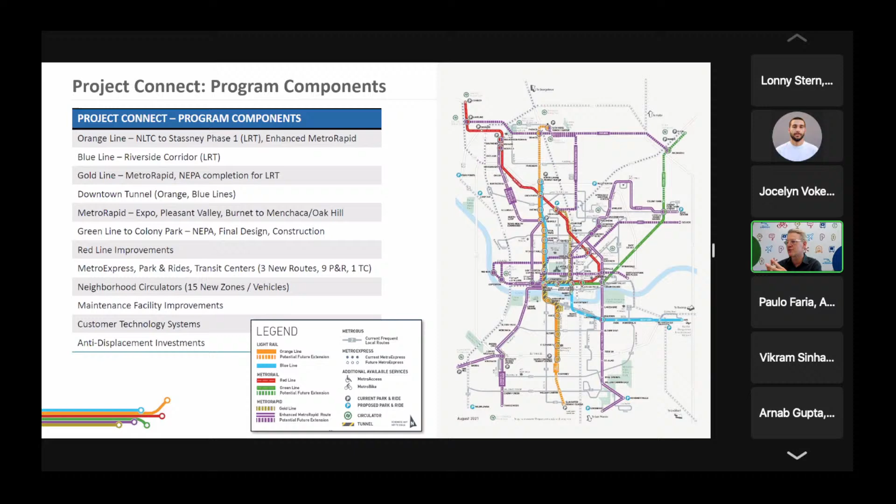But also the program involves a new commuter line, the green line, and improvements to the red line, the existing commuter line, plus 4 new Metro Rapid lines, 2 of which are already under construction. So we're already starting to move into implementation on certain aspects of the program. There are improvements to local service, new park and rides, new pickup zones, new facilities, lots of different elements. All these pieces have to fit together into this working system.

And just right off the bat, I want to talk about the elephant in the room, which I think has gotten a bit of press of late, and probably not a surprise to most of you. But costs on the program are going up. That's what we're seeing. Some of that is being driven by things we've discovered along the way. And so part of this process, the design process, is really about identifying all those elements that will have an impact on costs so that then we can manage those going forward.

And some of those include additional right-of-way and real estate costs, changes to project program scope. We learn things from the technical process, we hear things from the community, we adjust the design accordingly. Some of those things have increased cost. But also globally, we're seeing enormous inflation and construction escalation costs. This is a global phenomenon, but particularly acute here in Austin, where the economy is so overheated, or so hot, I should say. And so all these factors are contributing to a pretty extreme cost environment.

And that's going to be something that we're going to have to manage. I think tonight is about looking at the design, looking at where we are today, because a lot of work has gone into getting us to this point. But going forward, we're going to have to make some tough choices. As a community, we're going to have to look at project phasing. That's going to be an important part of managing costs, but there may be other choices that we're going to have to make. But importantly, that's going to be an ongoing and robust discussion with the community. We're going to have to make these choices together and move this program forward together, and we're going to commit to do that.

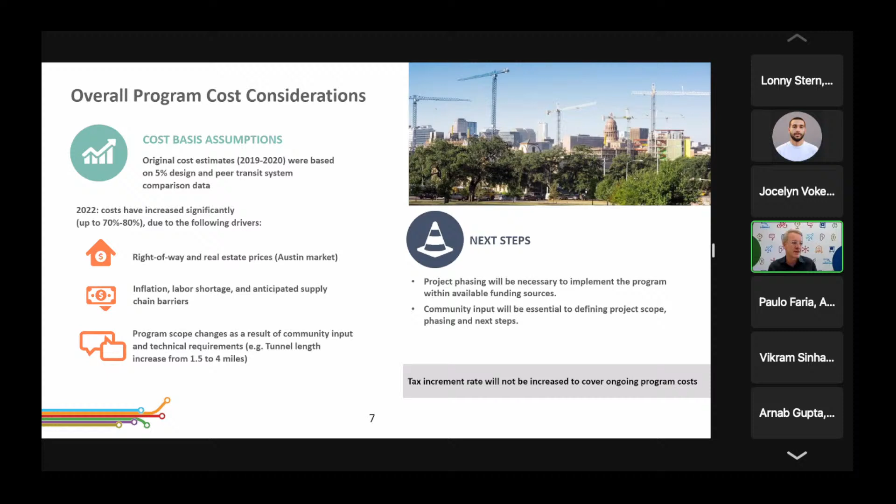Okay, now that I got that out of the way, we can get to more of the fun stuff. And with that, I'm going to pass it over to my colleague Paulo, who's going to talk about our approach towards the subway system overall.

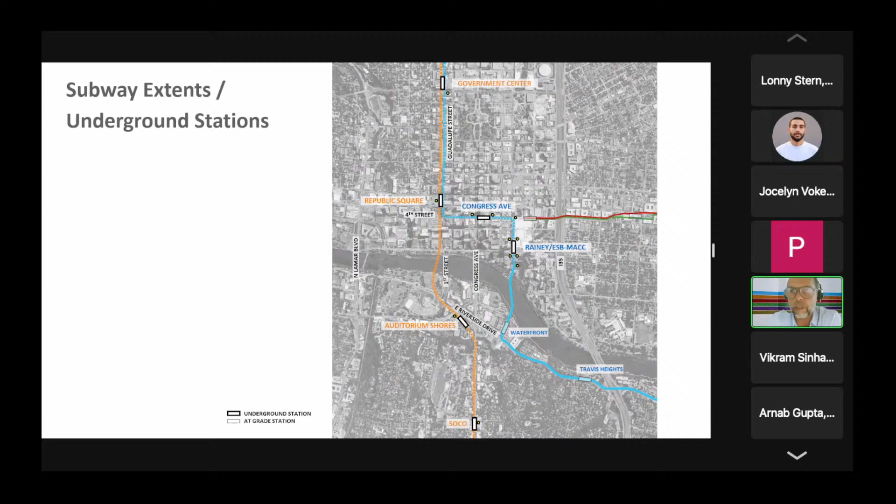Thanks very much. So we are going to concentrate today on the underground station, the subway stations. I think they have their own challenge in terms of design, in terms of experience, in terms of how they relate to the urban realm. We'll really focus on the downtown stations, and go on a one-by-one basis to evaluate and show their sites, opportunities, and constraints.

It's really an example of a typology. We are talking about relatively deep stations to be able to make the arrangement, the alignment work. Because we're coming underground, some locations we're going above ground, so we have to make it work. We have to make those stations to a specific height and depth.

The overall idea is that you engage in the urban realm, you get vertical circulation elements or stairs to a mezzanine or concourse, and make a decision that distributes yourself again to the platforms. So there are certain things associated with underground stations that are important.

People lose their cognitive abilities. You can get lost underground because you lose your connection with the sky, you lose your connection with different elements that you know and recognize. So there are certain things in the navigation of the stations that are important. The idea of getting below grade is not something that humans like to do, so we have to manage that and create experiences that are orchestrated around our own cognitive challenges.

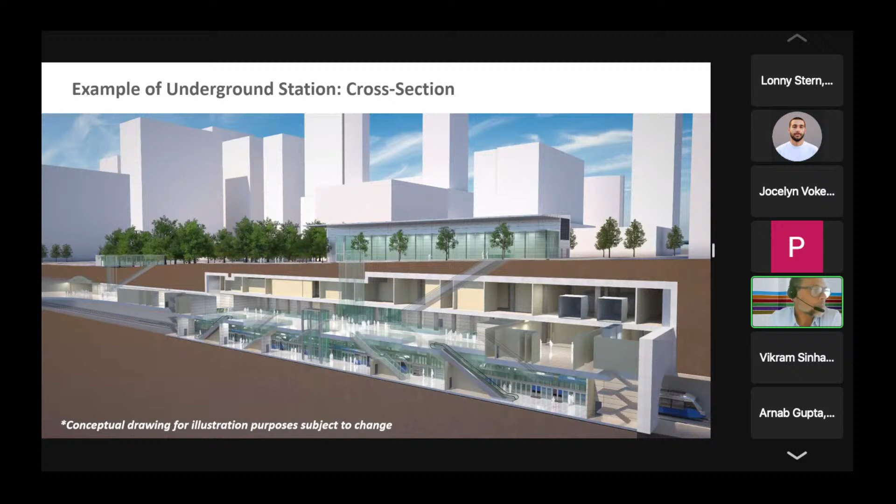Ultimately, we have to design for all. So the aspiration is to implement universal design. The designs are developed independent of individuals' abilities. We have to design for the visually impaired, we have to design for people that have mobility challenges. So one design has to fit all.

That means we have to adapt the design to provide equal access, universal design, and full accessibility to all. So the choices that should be made by people that are able-bodied should be the same choices that are made by somebody with a disability.

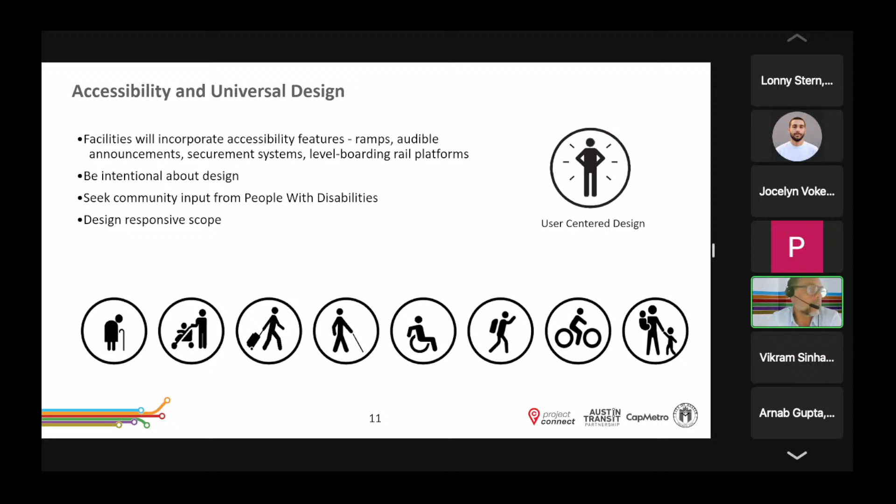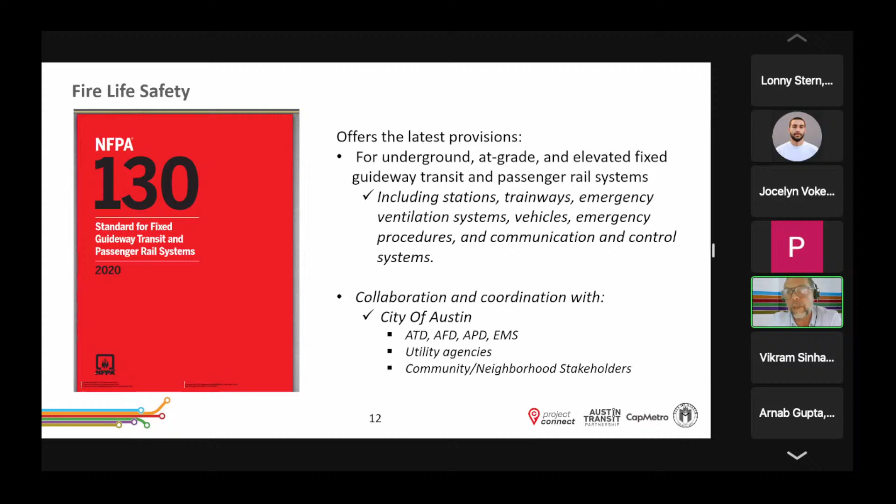Another important thing is security and safety. We have to design for NFPA 130, but it's not just because we have to — it's obvious that if you are underground and you have limited ways to escape for conditions that rarely occur but do occur, like fire or other emergencies, you have to make sure that the stations are ventilated and exhausted, and that people can achieve points of safety within time that allows those systems to kick in, without risk to life.

From a design perspective, what's important is that we have three different zones. We have an entry pavilion that should be legible, meaning it has to be recognized in the urban realm because people have to find the stations. It has to have a positive presence on the urban realm, something that enhances the public realm and the streetscape where it's sitting. We have to make the vertical circulation elements — elevators, stairs, escalators — visible at every moment, because as you are in a station zone, you want to see your options of vertical movement ahead of you.

Visibility of vertical circulation elements is paramount because it makes you anticipate your next step. What you don't want is people spending more time underground than they need to. So we want clear sight lines and as much visibility as possible, from a point of view of safety and navigation of the station. We're trying to orchestrate the experience, making sure that sight lines and paths of travel are clear, and that each zone can see the other zone, giving you predictability on your next steps of the trip.

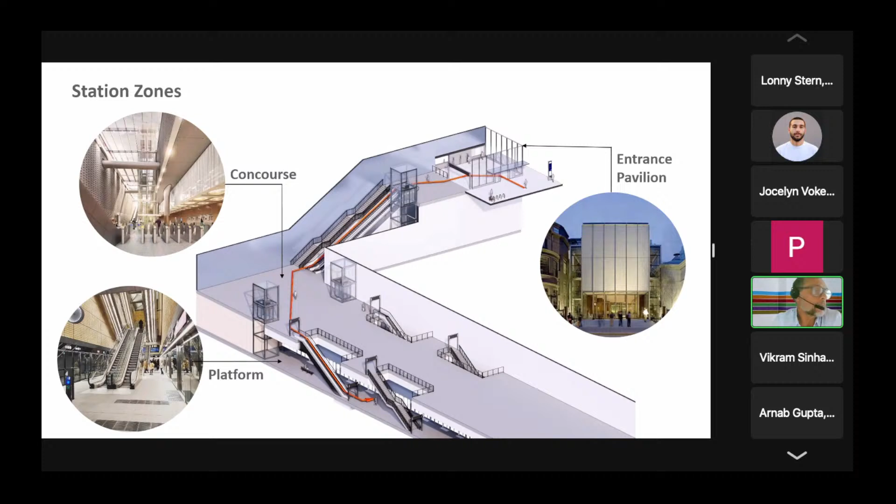So we want to minimize the number of decision-making points. You want to make a decision at the street — that is, I'm going into the subway. To do that, you have to provide clear information about the system, where you need to go, whether the service is running, if it's on time, what the next train is, and where it's going. You want to push that decision to the streetscape and the urban realm, so people only enter the system when they have definitive information and can embark on the trip.

It is important from a point of view of safety as well, that you don't want people meandering and uncertain about where they go.

Right now the idea is: can we provide enough information at the right place at the right time, so people engage with the system at the street? They go down underground to the mezzanine and concourse, and then they have to make another decision: am I going southbound or northbound, eastbound or westbound? So you have a choice to make on which direction of the line you are taking. We want to minimize decision-making points because we want people to be able to read the journey early and consistently, and we have several ways to do that. You can use light, texture, color, form, and public art to help people understand this journey and have a safe and tranquil trip. We want people to be at ease, comfortable, and secure about the reliability of the system.

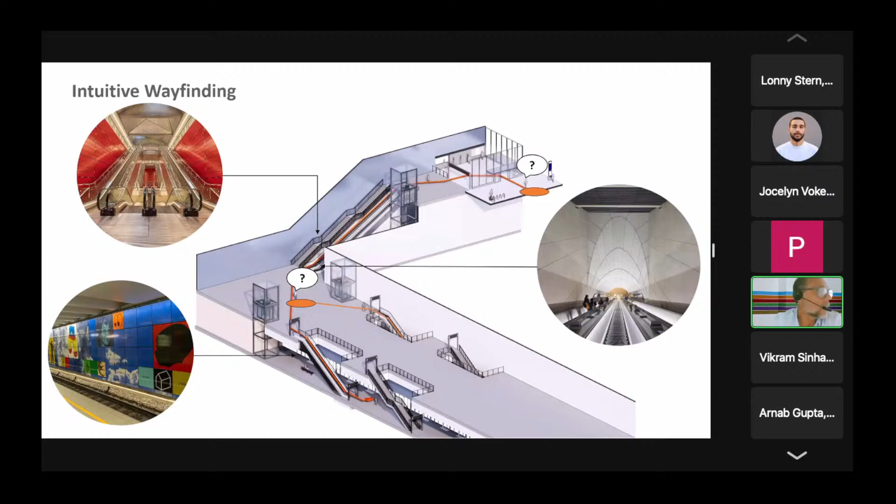An important thing is natural light. As I said, you lose your bearings underground, and as you are leaving a train or connecting with an underpass on a concourse, you want to see where the light is, where the sky is. You should use natural light as a tool for intuitive wayfinding. You can have signage that supports intuitive wayfinding, but you want the architecture to be guiding you to where you need to go — the design of the stations, the use of skylights or different ways to introduce natural light. Natural light has its own temperature, color, and quantity, and is tied to our circadian cycle, so knowing whether it's night or day and understanding where the light is coming from helps people navigate the stations because they understand where they need to go.

So the strategic and wise use of natural light is something that we're trying to foster through the stations as much as we can.

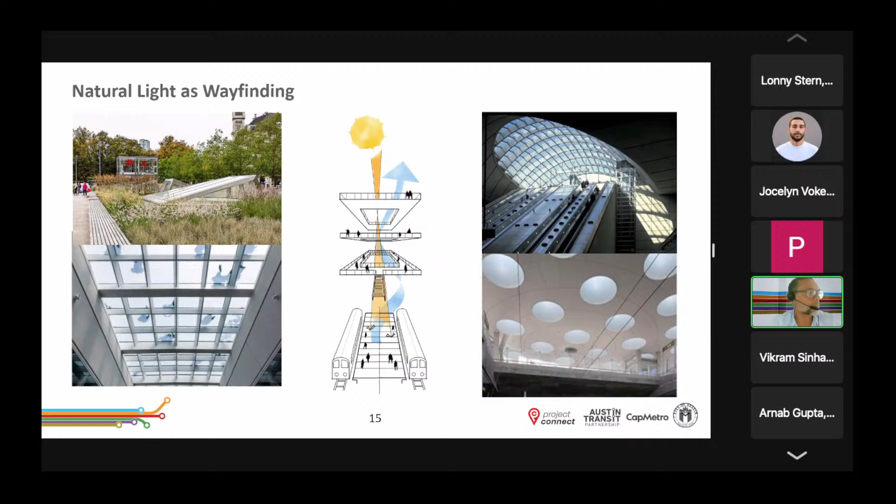We don't always have the right way to have an entrance pavilion that has the proper kind of civic characteristics — we're trying to instill a sense of civic pride and make us all owners of the infrastructure. Sometimes we don't have the space for that, so we have to use standalone elevators or standalone entrances that are smaller and have to fit on a sidewalk or in a smaller space. I think the basic characteristics don't change, but it's more a matter of scale, making sure that in those smaller entries you have the same degree of certainty about the service running. It's about providing the correct information to the user at the right place and the right time, independent of scale, whether you're in a building, a canopy, or a stair on the sidewalk.

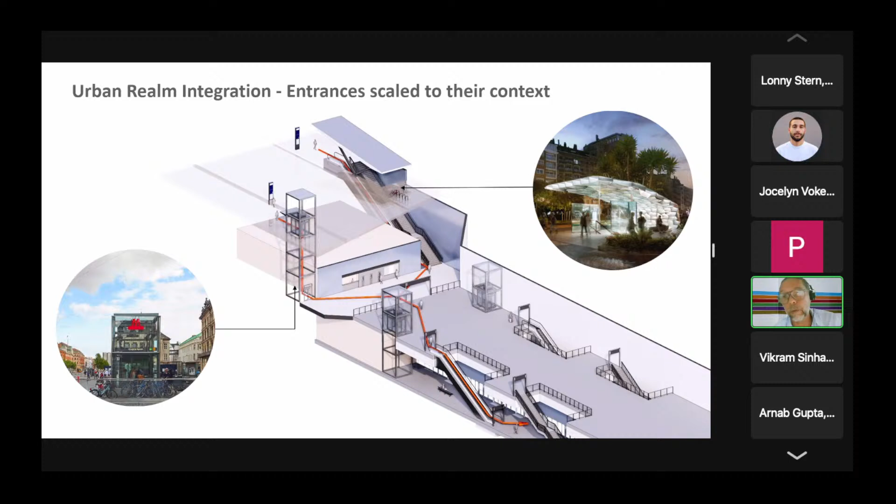So just as a summary, I think we have to foster a seamless path of travel, making sure it's direct and as straightforward as can be. We want visible and predictable entrances so people can orient themselves and find the system. The success of the system has a direct correlation to how usable it is, so you have to make entrances visible and predictable in the urban realm.

Have a clear and organized passenger information plan that ties digital and physical information — it's not just about the signage within the station, but what people are getting on their device, other planning tools like maps, area maps, strip line maps — making sure all the pieces of this passenger information plan are integrated and serving the user.

Reduce as much as possible any blind spots. It's the application of CPTED, crime prevention through environmental design — making sure you don't have hidden places, niches, and areas where your vision is obscured. It's not just from a safety perspective, but from a perception of safety perspective as well. You want people to be calm and safe as they navigate through the stations — no dead ends, and as I said, maximizing daylight.

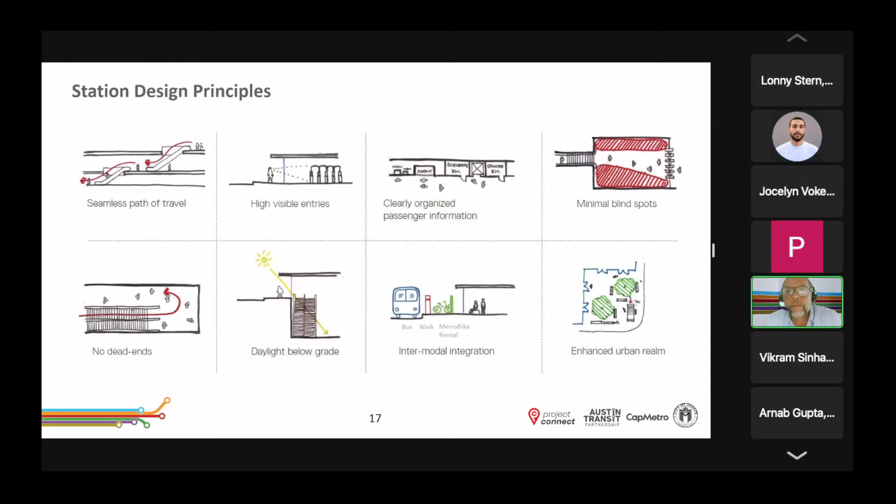We want to hear from you in one of our pauses: what are the types of amenities that you would like to see on the underground stations? We are trying to design based on user needs, so we thought it would be good to give some examples of what other systems use. But that's not the full menu of options—we want to get to the full list by working with you.

So some of these are amenities, and some others are necessary—like a customer service booth with attendants and ambassadors of the system who can help people that don't necessarily do well with digital tools and digital planning.

So having somebody to talk to is always good. Retail or vending machines offer convenience, being able to grab something as you're going to work or going home. There are systems with new technology where you can scan a product through your device and get it.

It requires a partnership with some supermarket—but retail, vending machines, water coolers, elements of wayfinding more associated with the context, area maps, institution maps, or elements that help you navigate outside of the station. So information products for the context in the urban realm, not necessarily for the station itself.

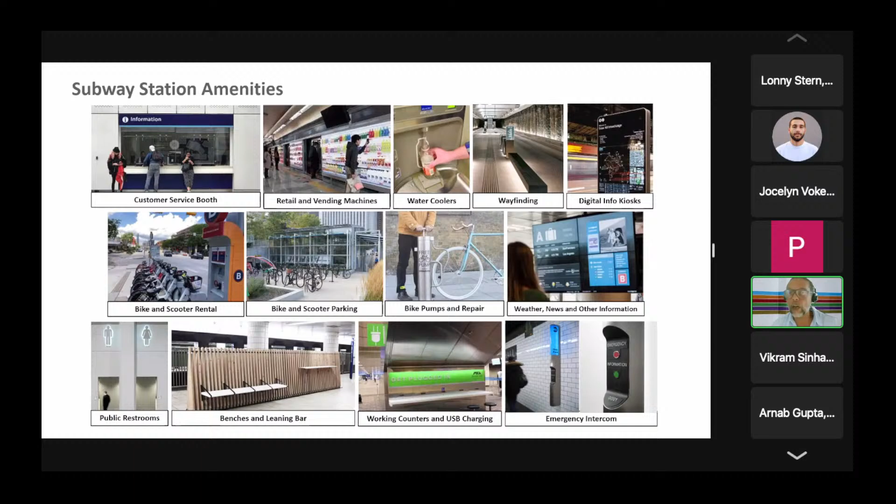Communication devices, intercoms for safety and security. So these are kind of the more standard palette of things we're looking at, but we'd like to hear from you if there are other opportunities we haven't thought of, doing something that is tailored to Austin. Next.

One thing that's important to know is that constructability has a direct impact on how the stations work. On the left, you have a cavern done by a TBM, a tunnel boring machine, that has smaller impact to the urban realm because you are tunneling in a mining way, but that has issues of cost and has to be in the correct soil—it has to be in the same alignment, so you can't do that everywhere. So we have to actually engineer things to choose one of those two options.

The other is cut and cover. That's top-down construction, where you retain the wall, then excavate and build something underground. But we are not talking about that because we don't know what those things are right now—we know what the techniques are, but we don't know when we're going to apply them. My next slide is just to point out that depending on how we actually build, there are different expressions for the station.

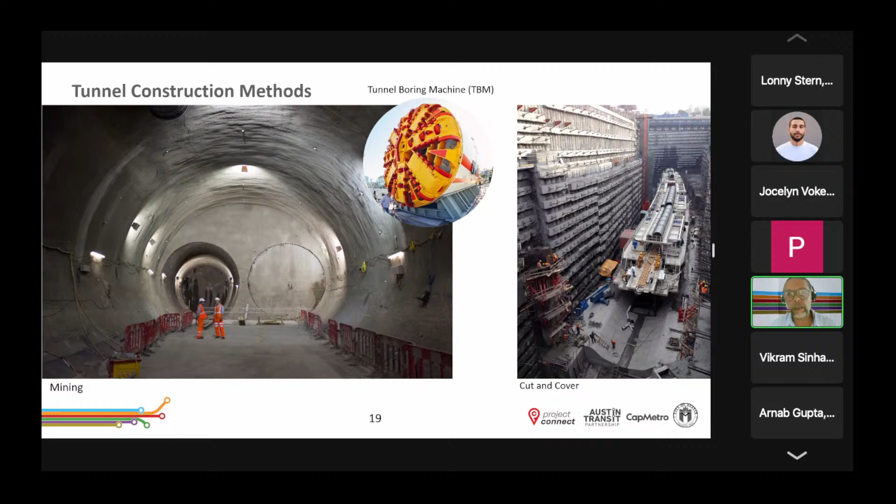On the left is the Elizabeth line in London, done by TBMs, where you have the shape of the tunnel being excavated that provides a more compressed space, where wayfinding is more fundamental—you have to really have those tunnels where you go and connect A to B in a very direct way, and that requires one type of architecture and design expression.

On the right, we have cut and cover—that really lets you create grander spaces that are better for wayfinding. But at the same time, there are pros and cons that go beyond what we need to decide. If it was left for architects to choose, we would know what to choose, but in reality this has impacts and requires a lot of engineering to happen before one of those two methods is chosen. And we are not there yet.

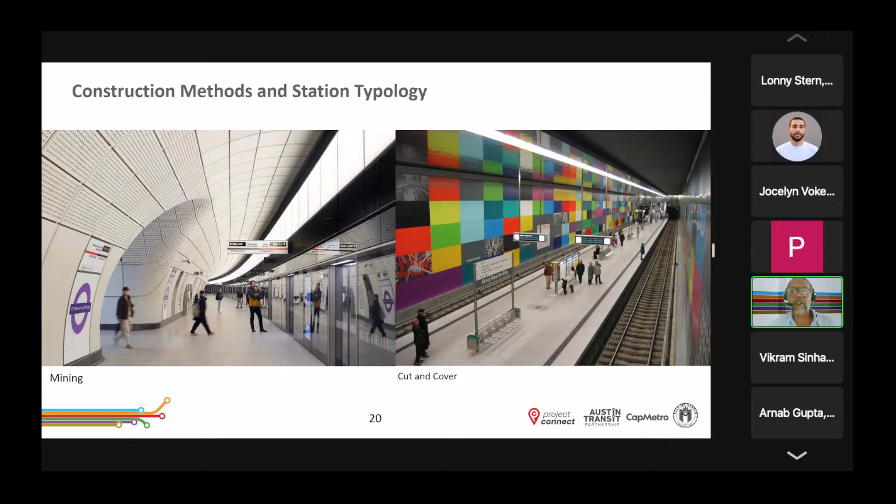Okay, so that's my part, and I'll let my colleagues go into more detail on the Orange Line North stations. Thank you.

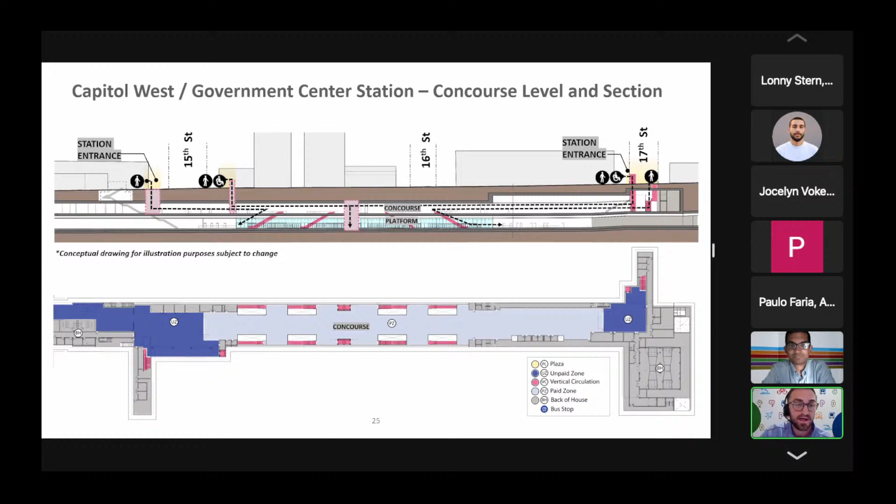With this station, we also have back of house elements, as Vikram pointed out, represented by that gray color. Those are critical to make the station operate well—everything from lighting to air conditioning to ventilating the underground station, which is very critical for safety in the event of a fire or emergency, making sure the air quality underground is safe for humans. That's absolutely critical with all these underground stations. It won't be available to the public to access, but it is critical to make the stations operate, and you'll notice these elements in all of our underground stations.

So that covers Government Center, and we'll move a little bit further south here to Republic Square, down near 5th and 6th Streets on Guadalupe. So back to you, Vikram, to cover the area.

Yeah, just really quickly, this is an exciting area. A lot of changes happening here. We're looking again to place the station a little north of Republic Square, but really the station box itself will be located under the street. Just a lot of things going on here. And Andrew, I'll let you talk a little bit more about it.

Sure, thanks Vikram. One thing I didn't point out at Government Center, but I think is even more critical here at Republic Square, are the bus transfers. Right at the square between 4th and 5th Street, that's a major bus hub for Austin. Having good connectivity points from the local buses to the underground light rail system is going to be absolutely critical, and that will continue to be planned along with the Orange Line and Blue Line designs as we progress. Making sure we have bus stops located near our station entrances will continue to be of prominence here.

This station's a little bit different than Government Center in that we do go off of the right of way a little bit more. Between 5th and 6th Street we have a little bit more room for that prominent station entry plaza and really the activation of that public space, which is great for this area in particular.

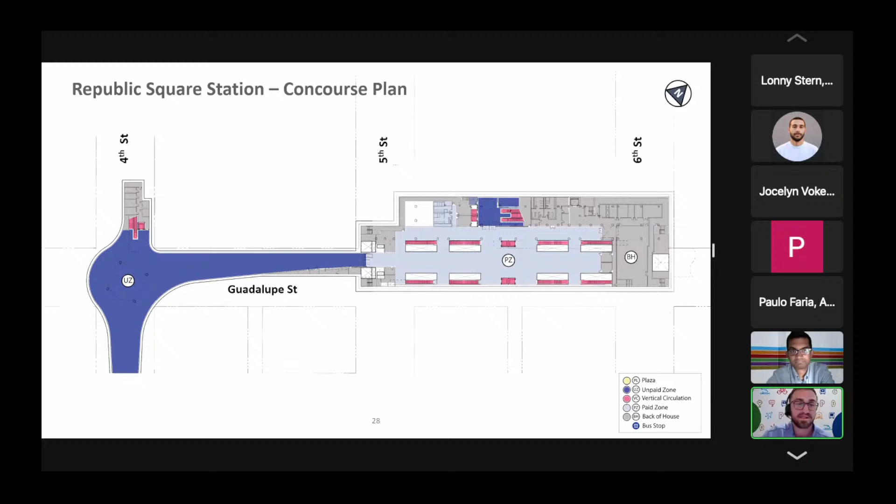This station in particular, I think we have a section view next. Great, so just wanted to point out that this station is actually a little bit deeper, so it has 3 levels rather than 2 like we saw in Government Center. This allows us to have that nice long public space in the form of that concourse, given that we can locate some of the back of house elements on the first level closest to the surface, and create that continuous concourse all the way to the Congress Avenue station with the Blue Line, then down to the platform level to create all those wayfinding elements and nice public spaces underground.

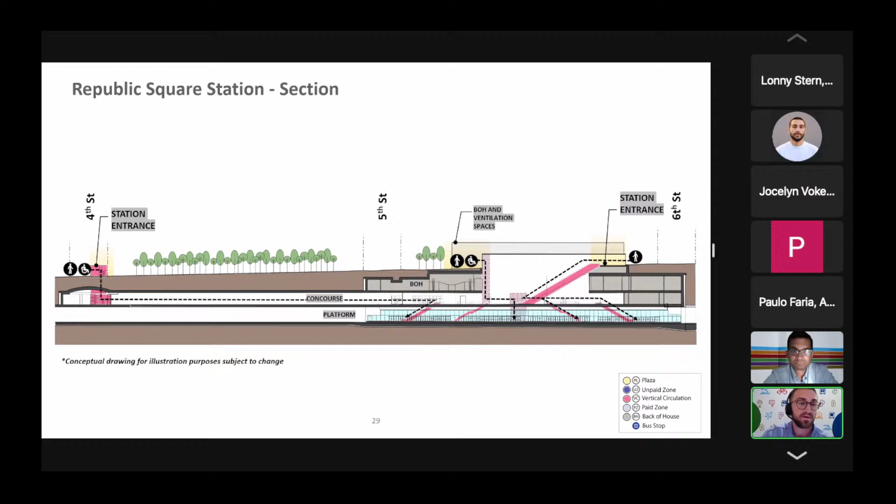I think we might pause here a little bit for some questions and answers. So back to you, Lonny.

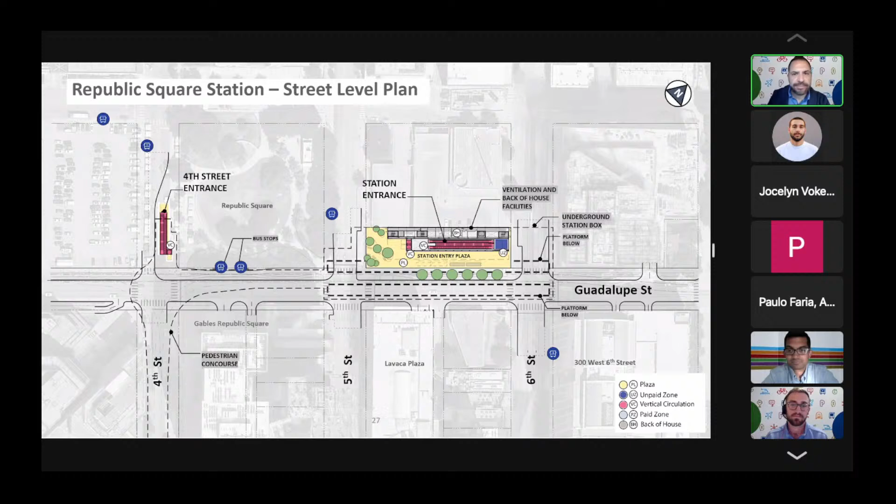Thank you so much, Lonny. I do have a question about cost cutting regarding some of these. Is there any discussion about maybe scaling back some of these, specifically like the mezzanines that connect one station to another? Since we have sidewalks, that seems like a sort of an added luxury. Is there any way of maybe delaying those to manage costs, or is that still being looked at?

So to your point, everything is still being looked at. Right now we're walking through the system as we would like it to be, and certainly we're open to discussions about what the system could look like given the cost situation that was mentioned earlier. We don't know what form that's going to take. A lot of that discussion is going to be with the community, identifying why you feel one particular aspect of the project is a luxury, whereas for other people they might feel it's a necessity. We're going to have a robust conversation with the community first before we make any value engineering decisions about any of these stations.

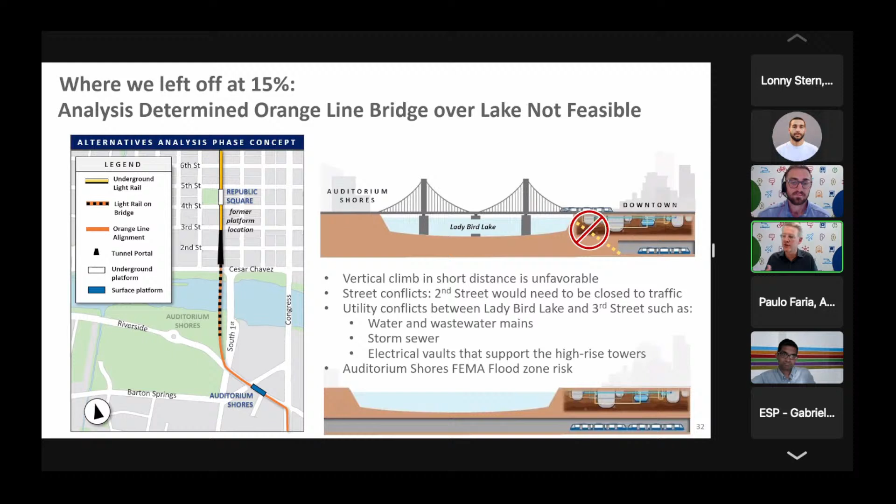We got a lot of feedback on both those options, and there was a lot of positive feedback on extending the tunnel, recognizing it was an additional cost, but because of the ability to locate the station more central to the commercial business district of SoCo, and more evenly spaced between Auditorium Shores and the Oltorf station, that's where we were at 15%. We got lots of feedback on it. There was a lot of enthusiasm for option B, the long tunnel version.

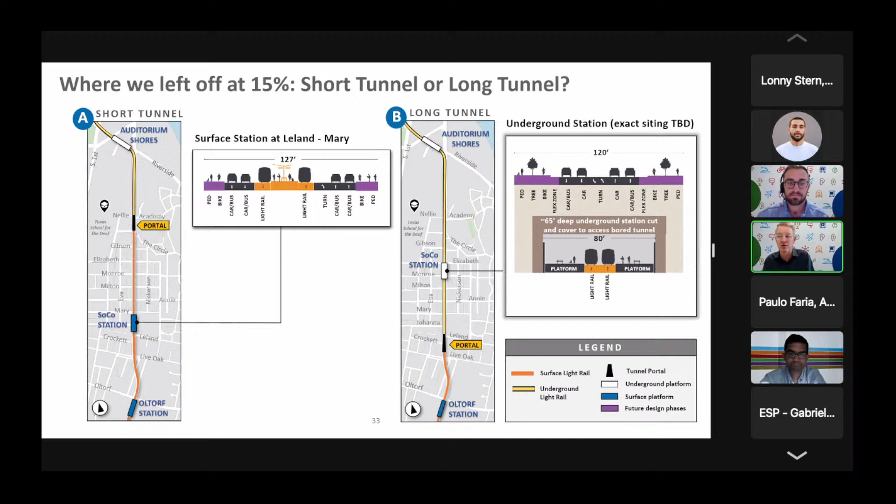Okay, go to the next. So in the process of developing the design beyond the 15%, we went back and studied all of our assumptions and constraints, working through the problem. One of the things we revisited was the details on the Congress Avenue Capitol View Corridor, which runs essentially from Live Oak Street north to the Capitol Dome. We knew about that beforehand and we were avoiding it - it wasn't an issue. We were aware of it.

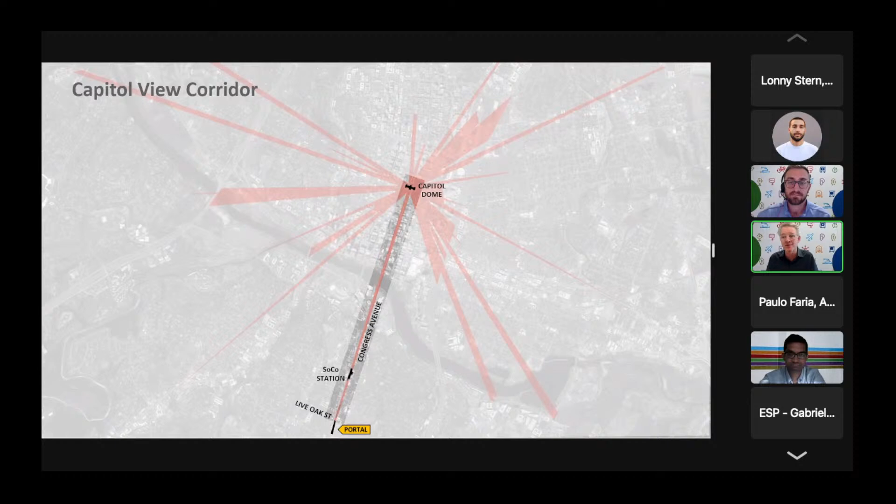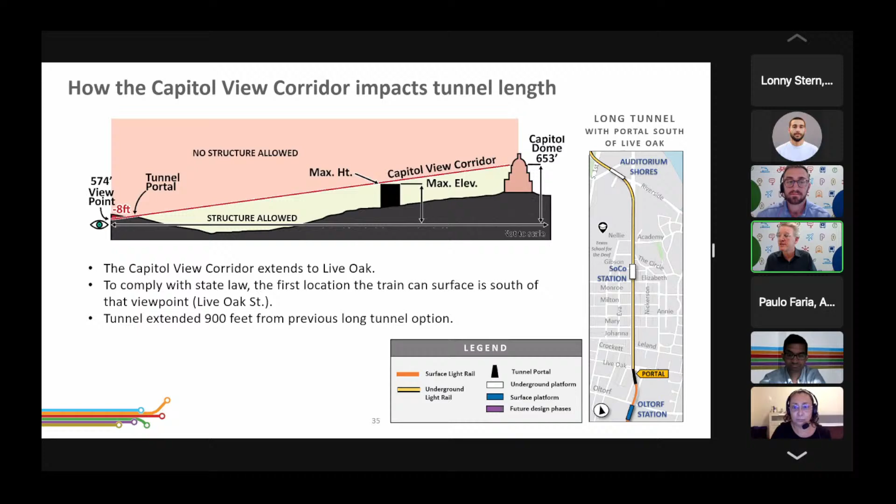As a result, that forced us to shift the long tunnel version south a little bit further, so we got a longer tunnel version. That's where we are today. If you go to the next, you can see the progression over time: pre-15%, the two options at 15%, and then where we are now with the draft 30%. It's very similar - the draft 30% is very similar to the long tunnel at 15% in terms of dimension, just a little bit farther south.

So there have been a lot of questions about the Capitol View Corridor - what are you going to do about that? We knew about it, we've refined our understanding about it. Could it be amended? Legally, very challenging - only been done a couple of times. Right now, for the purposes of the design, we're working within the needs of the existing laws and codes, and this is one of them. So that's where we are, and this is part of why we're having this discussion - to share all this information with the public, get feedback so we can incorporate that into the design progression as we move forward. Hope that helps set the stage for why we are where we are.

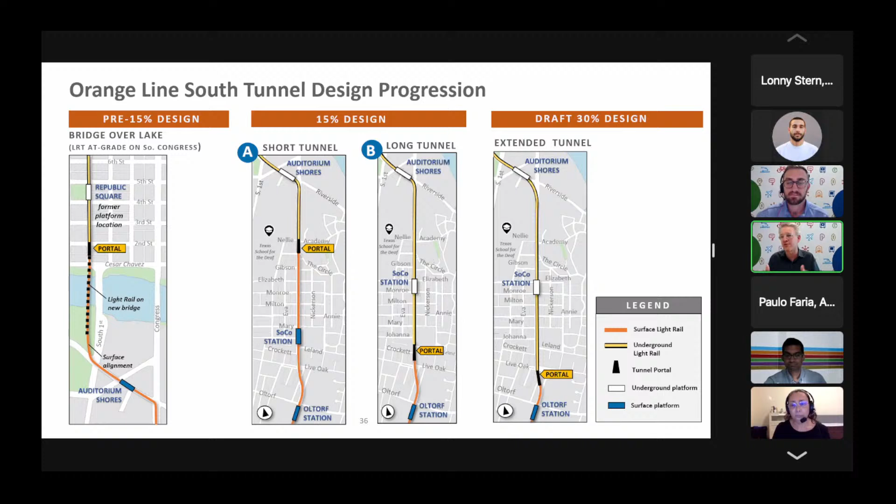And then I'll pass it back to Vikram and Andrew. Hey, thanks Peter, that was very illuminating.

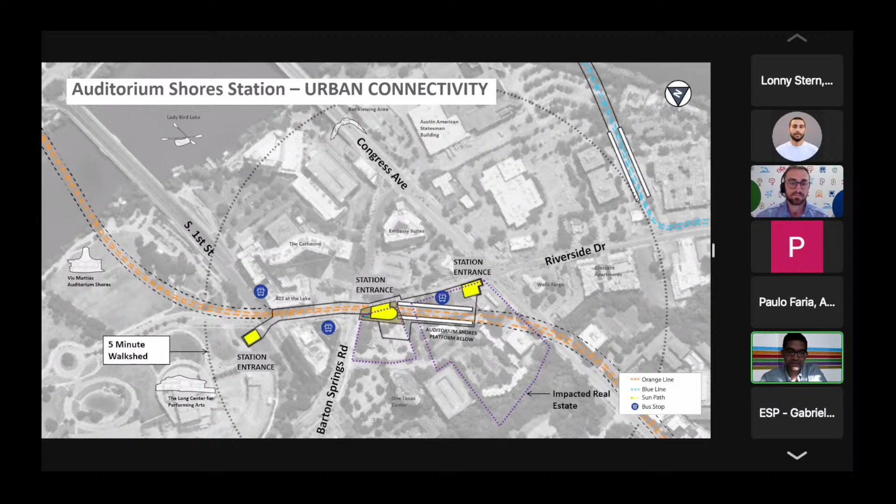So Auditorium Shores Station - now we're south of the lake. Next slide, please. Just some quick context here, folks. On Barton Springs and Riverside Drive, we're showing in this map view a walk shed, a 5-minute walk shed that extends about to where the Long Center for Performing Arts is in the west, and as far east as towards the proposed blue line, and goes up to kind of where Lady Bird Lake starts around Congress Ave. Just want to note the existing bus stops here and the station entrances, as well as the potentially impacted real estate outlined in purple - that's the footprint there. Next slide.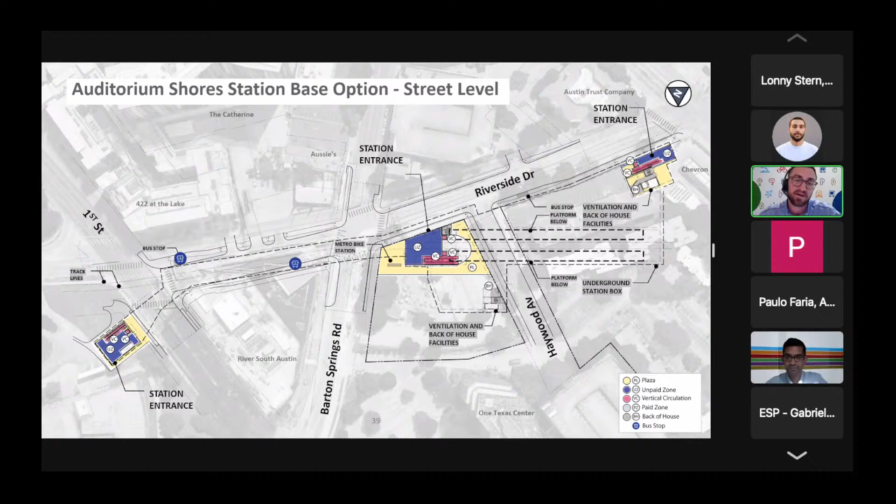If you go to the next slide, I'll kind of show how those entrances interact with the underground. Andrew, just really quick, Peter, did you want to talk a little bit about the pedestrian tunnel here? I'll pick it up at the end, Vikram, when we talk about the options. Thank you.

Okay, just to mention that pedestrian tunnel, you'll see that larger unpaid zone, that darker blue shape. So that currently is envisioned as a concourse, kind of like we saw downtown near Republic Square, to connect the Long Center area and Auditorium Shores more directly to the station underground. Peter will talk a little bit more about that in a bit, but that's what you see there in that darker blue - that's the underground pedestrian connection to the larger station box.

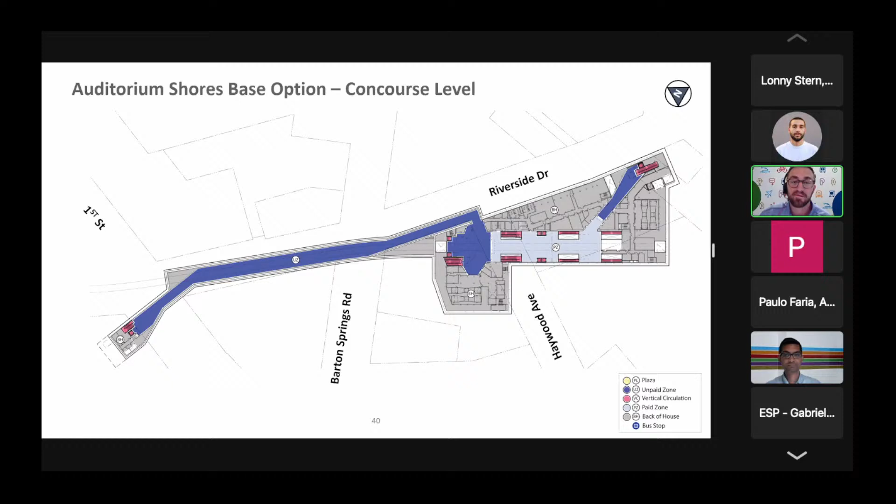This station is a 2-level station, so not quite as deep. We'll show that on the next slide, but because of that, we do have a lot of back of house elements on that concourse level, so making all that work is a bit of a challenge as well. And again, we have the northbound and southbound platforms, so we have access to both of those sides of the platform level from that concourse level. If you go to the next slide.

Oh, and then here's I think Peter's moment to chime in about the pedestrian tunnel. Thank you, Andrew. So one of the things that we wanted to get people's thoughts about is that we are looking at where are there ways where we can optimize these stations and make them more efficient, right? Knowing where we are with costs overall, how do we actually achieve all of the design objectives that were laid out earlier by Paolo, but then maybe do that in a more efficient way.

So this is an example that I think is something that we are considering internally, and I think we're going to want to get public feedback on, which is, do we really need to have that pedestrian tunnel extension, if you will, from that station entrance at Barton Springs Road, underground, connecting to the Long Center and Auditorium Shores, right? Because I think if it's very complicated to build that, I will tell you.

Lots of utilities in Riverside. It's kind of threading a needle. The cost of that is over $100 million probably to do that extended entrance tunnel. So the question is, is that really necessary? And do people feel like that's a really significant value add? Again, no decision needs to be made tonight or in the immediate term, but I think it's something that we want to look at as an option for a way to kind of tighten this station up.

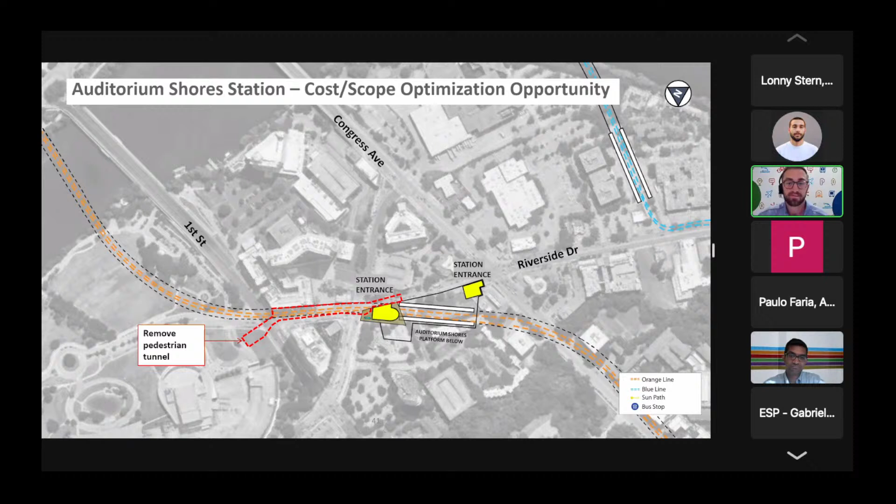I think we can move on to Soco. Next slide, please. We've talked about Soco in the past, in April of this year, but we wanted to include this as a discussion. Nothing really new here from our April discussion, I believe, right, Andrew? But you can talk us through it real quick.

I would encourage people who want to learn more about this station, we did a very deep dive into this station and all the elements associated with it in the working group meeting that was not too long ago. So we'll go a little quickly here, there's a lot more to cover, and I want to make sure we leave time for the other stations as well.

Just to quickly point out some elements here, we have a few different entrance locations. One more prominent one is at Elizabeth and South Congress Avenue, where we have 2 elevators and some ventilation elements, plus a nice plaza activation. Some of the other entrances are more in line with the sidewalks and a little more constrained for space. But as in the other stations, we have 3 elevators, 2 escalators, and 2 sets of stairs on both the east and west side of the roadway.

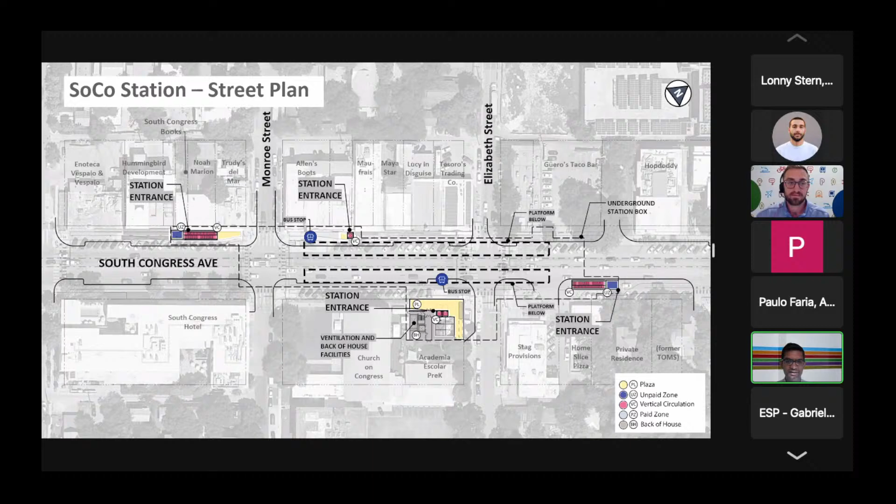I think we should keep moving fairly quickly through this one, and maybe we can drop a link for that other recording in the chat. It is located on our public engagement library, that's the South Congress Working Group meeting. Should we go to the next slide?

Just to close this one out, we'd have a 3-level station here with a lot of those back of house elements located on the first level. Those vertical circulation elements from the street would access the concourse level, and in each case we have multiple escalators, stairs, and elevators. But I do think we should keep moving on this one.

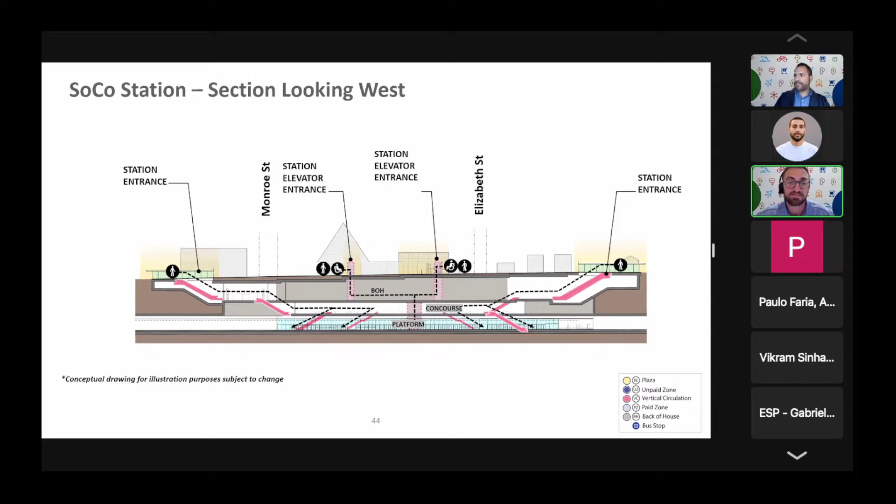Andrew, how deep are we going to be underground? With our 2-level stations, like Government Center and Auditorium Shores, we'd be more in the realm of 50 or 60 feet underground at the deepest point. Once we get to 3 levels, we get a little deeper, more in the realm of 80, 90, 100 feet in some cases, with variation due to the existing grade above. So fairly deep underground, especially for these 3-level stations.

Thanks again for walking us through. I wanted to take a break here before we transition to our downtown stations around 4th Street and the Convention Center, to talk again about Auditorium Shores and Soco stations. Hopefully some of your questions have been answered in the interim, and I'd encourage you, if you have a question, to click the raise hand button at the bottom of your screen. I see a few people here, and I see Andrew Pyle has been waiting very patiently. Andrew, if you want to join us, click unmute and you can be live on the air.

Hello, Andrew Pyle here. First of all, thank y'all so much, Project Connect, for y'all's hard work on this.

My question is about the location of the Capitol West station between 15th and 17th Street. I've been listening but haven't heard about the logistics of it. I know y'all said before that it's located there because of proximity to the Capitol and other government buildings, but I think I remember previous designs showing it would be directly parallel to the Capitol itself, or at 7th Street. And from Metro Rapid 801, there seems to be more traffic coming on and off at the Metro Rapid Capitol Station and at the 7th Street History Center station. So I'm curious why y'all decided to put it at 15th and 17th Street.

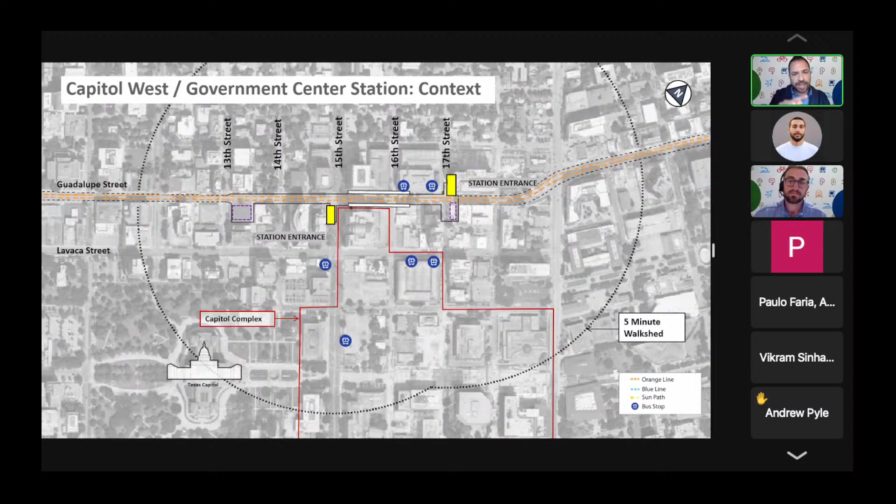In addition, there was another question about 15th Street. So since we're here, Jamila, if you want to move one back to where you were before, they were asking about narrowing of lanes.

Do you know, Andrew, is a travel lane being removed in this section, or is it just that it's below grade, so it looks like there's a travel lane that's disappearing?

I think we are removing one through lane. We will still have that bus only lane on the west side, and then we'll have two general purpose lanes. I believe with this project, we are generally trying to provide wider bike ped connections to serve different modes. I think that's a longer term goal of the city. I can't speak to this being the case in every location, but you can kind of see it just north of 17th. You can see that bus only lane and the two general purpose lanes, as well as the widening and the bulb outs of the sidewalks to provide separated bike ped facilities in that location.

Thanks for that. Andrew, I think the question was actually about 15th Street, and I don't think we're reducing any lanes on 15th Street. Maybe this is something that's not monolithic around here, so maybe this is something we should just answer in detail in the Q&A that gets published. Yeah, that's a good idea, Peter.

We've got one more question here from Janice. If you wanted to unmute yourself, you could be live on the air. Yes, thank you. Can you hear me okay?

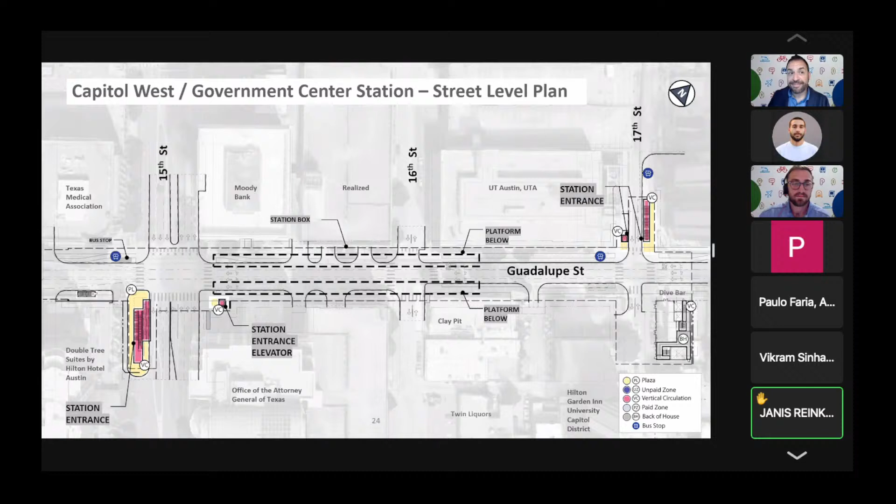Sound great. All right. My question would be, and I know you spent a lot of time working on the diagrams and thoughts about how to stage the underground rail, but considering there's a $5 billion deficit in the original budget and the current project projected cost, what would the cost difference be if building the system without the subsurface rail? How much could be saved?

Well, let's see. Is there anybody who's on the project team that could answer that at this point? I'm not sure, Peter, if you could do that. Yeah, I mean, I don't have the figure. It doesn't need to be dollars and cents.

No, I mean, it's a lot, right? I mean, let's be honest. I think it's a significant part of the cost, and I don't want to put out a number because I don't want to get it wrong. I think we can go back and pull that out from previous memos that have been circulated. I guess what I would say is I think your question is a perfectly legitimate one, and certainly one that we have to answer.

I mean, having an underground system in the center of the system was part of the idea for this system, and so that's why we've developed it to the point where we are today.

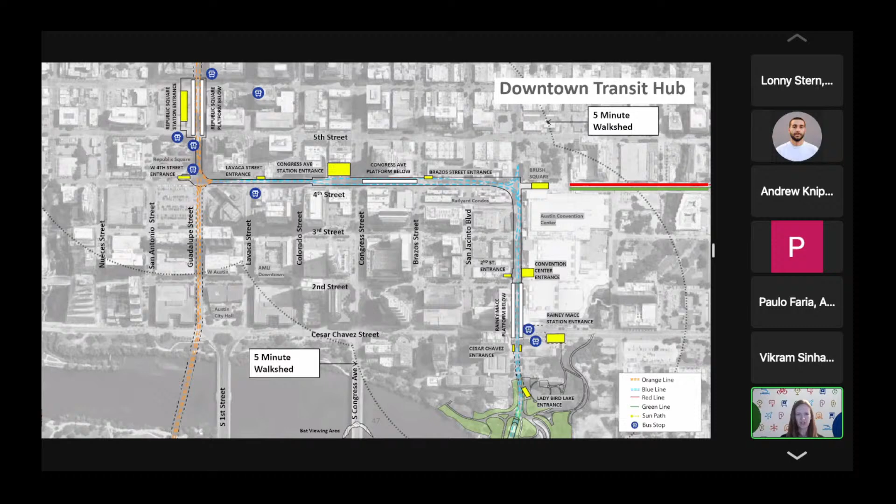Above the transitway, the lowest level of the tunnel - you can go to the next slide - you have the continuous concourse we've been talking about that provides that connection between the stations and between each of those entrances, which I'll talk about in more detail. So at any entrance point, you access this mezzanine level, or level -1. If you think of street as level 0, the concourse is level -1, and the trains are at level -2, so you can easily navigate between any of these points.

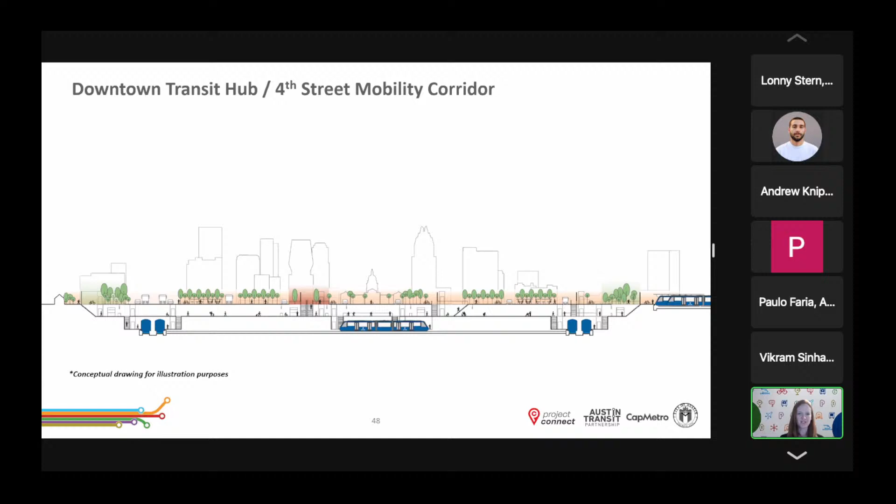Next slide, jumping into the Congress Avenue station. You can enter this station from Congress Avenue - the elements here in color on the left show the station entrance. You come down either via elevators, stairs, or escalators and enter the concourse or mezzanine level below. You can also enter from the Brazos Street entrance to the east, which has an elevator, stair, and escalator as well.

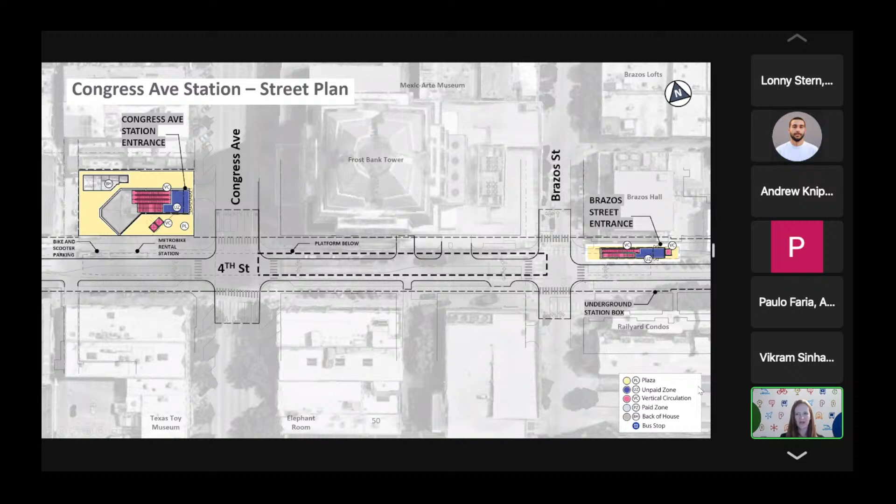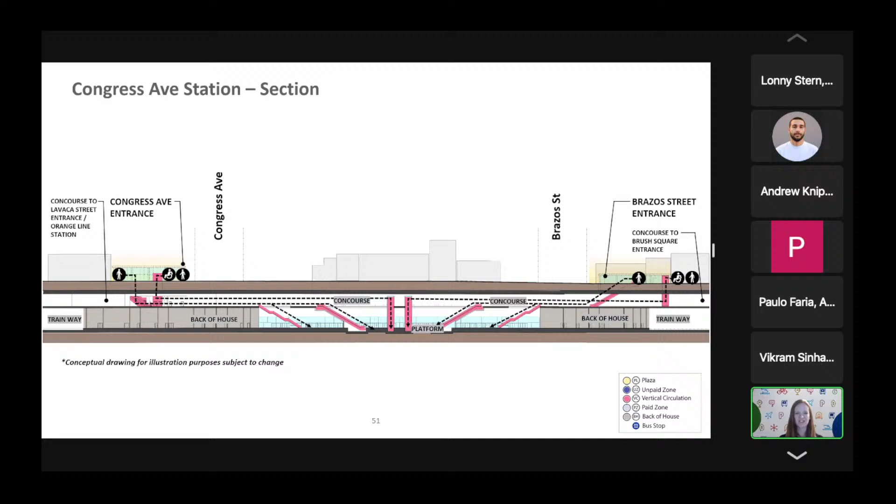Going one level down as we walk you through the station: as you get to the concourse level, you approach the station depending on which direction you're coming from, and you have that next set of vertical circulation - stairs, escalators, and elevators - to get you down to the platform level.

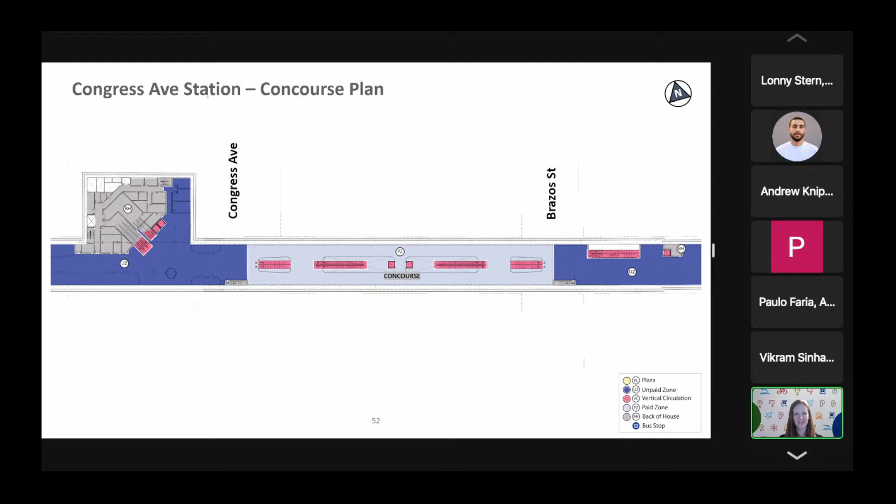Here's that concourse level, where each of those pink items are the stairs, escalators, and elevators I mentioned. There were some questions about whether we have enough capacity to get people with mobility challenges down all the way to the platform level. You'll see we have planned redundancy in these elements to circulate from street level down - at this station, for example, there are up to 4 to 5 elevators ultimately coming from different entrances and points to each station, and a similar number of stairs and escalators.

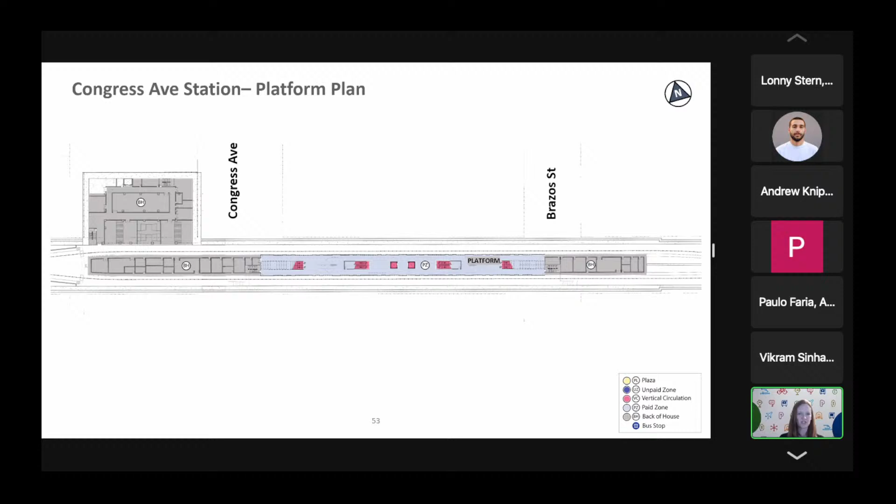So now you can see that those are at each end of the station platform level that provide you access to that concourse level above.

Next we'll move over to the Brush Square entrance. The entrance here is just that—it's an entrance, not an additional station, meaning it provides access to the other two stations, both the Congress Avenue station and the Rainey MACC station below. So here we've got escalators, stairs, and elevators right in front of the convention center and Brush Square, in the plaza area along 4th Street or east of Trinity.

You might also notice some elements shown in the footprint of the existing Austin Convention Center. Those are for ventilation of the tunnel, to maintain safety and air quality for the tunnel level. We don't intend on cutting into the convention center, but we do need to locate those elements, and we're trying to be mindful of not placing them right in front of a park and the convention center. The thought is to work with the convention center redevelopment to potentially integrate those into a future structure here.

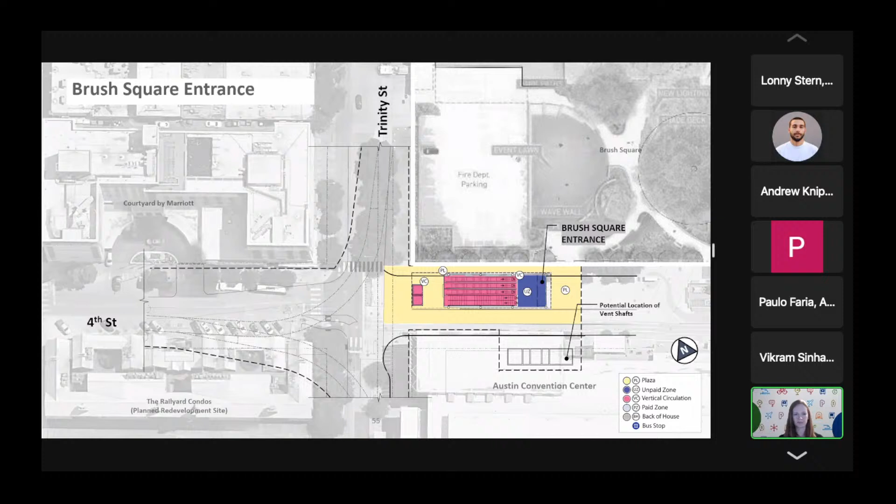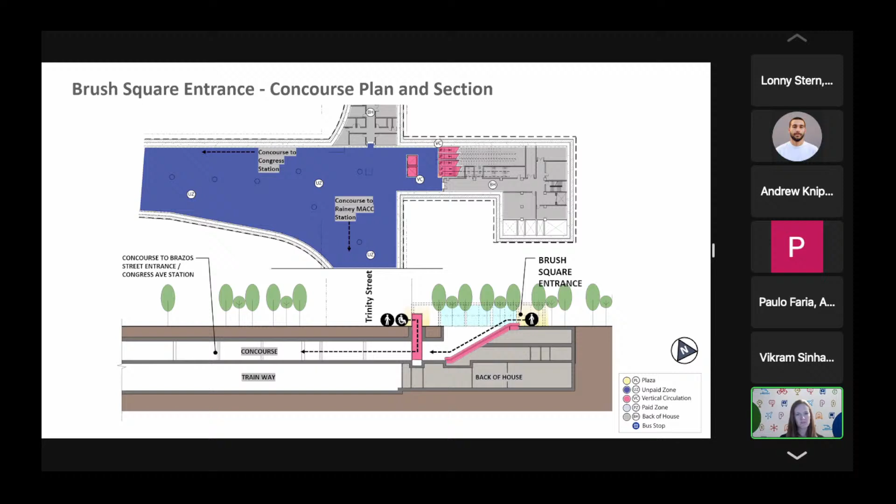Here's the concourse level, one level below, down to the mezzanine where you come down from the street and can connect to the Congress Avenue station to the west, or turn south and go to the Rainey MACC station.

As we approach the Rainey MACC station, there are actually multiple entrances to this station, shown here in yellow. I'll start from north and go south. We have entrances planned to connect to the convention center along 2nd Street and on both sides of the street, since we have split side platforms here in this location.

If you're wondering why we choose a side platform or a center platform, it tends to have to do with track geometry. For center platforms, the track has to widen around that platform in the middle, creating curves that can't overlap with other curves. At the Rainey ESB-MACC station, we have curves necessary to turn from Trinity to 4th Street just north of the station, and to turn onto the bridge over Lady Bird Lake just south of the station. That doesn't give us enough room to widen around the platform, which is why we have side platforms here.

Moving south of the station, there's an elevator and a stair just south of Cesar Chavez. To the east, along Cesar Chavez closer to Waller Creek, we're showing a larger station entrance with multiple elevators, escalators, and stairs. Lastly, the yellow box farthest to the south shows a pedestrian concourse ramp, which I'll explain more in a moment. That provides close access to the Emma S. Barrientos Mexican American Cultural Center and Rainey District to the south and east, as well as connections to the hike and bike system, the Butler Hike and Bike Trail, and the park north and south of Lady Bird Lake.

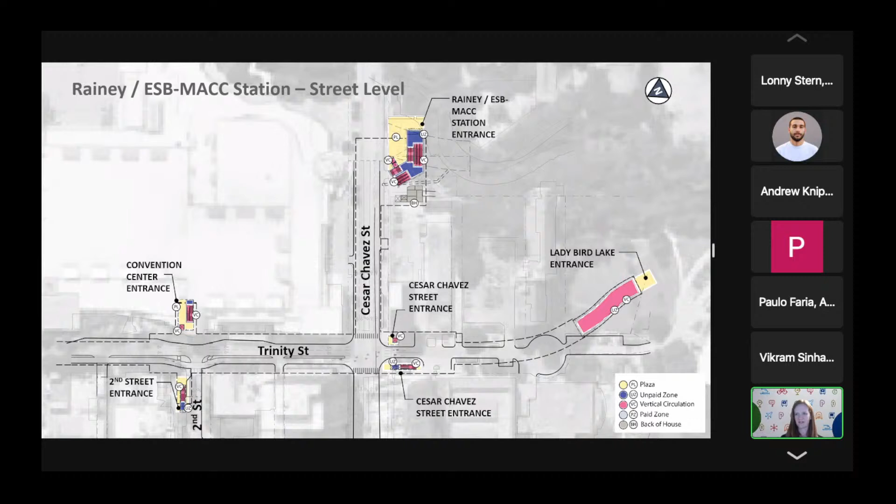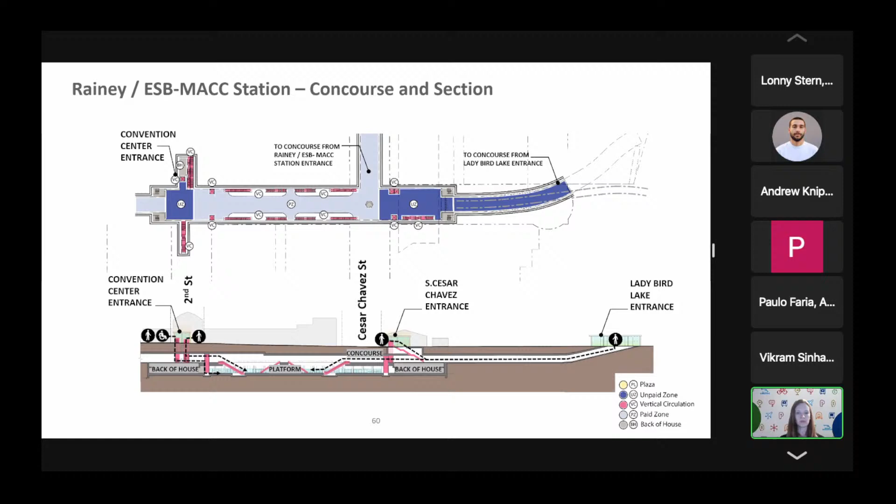That ramp entrance is a place where the underground tunnel, which has two levels—the concourse above and the level for trains and station platforms below—splits apart. As you can see in the bottom drawing, or section, that ramp starts to come up to the surface or ground level, while the trains stay down below in a tunnel beneath.

And you can, in plan view here, you can see where that would come out in daylight. I'll show you some examples of what this could actually look like in the next slide. But what it is, it gently slopes up. You can see here in plan view how it connects to the trails.

By sloping up to reach ground level, you can have a gentle ramp that doesn't require elevators, stairs, or escalators. You just walk straight down into the concourse from the trail system, which will connect to the Butler Hike and Bike Trail, as well as the Waterloo Greenway trails, including the new pedestrian bridges planned over Waller Creek and the Waller Creek Delta project.

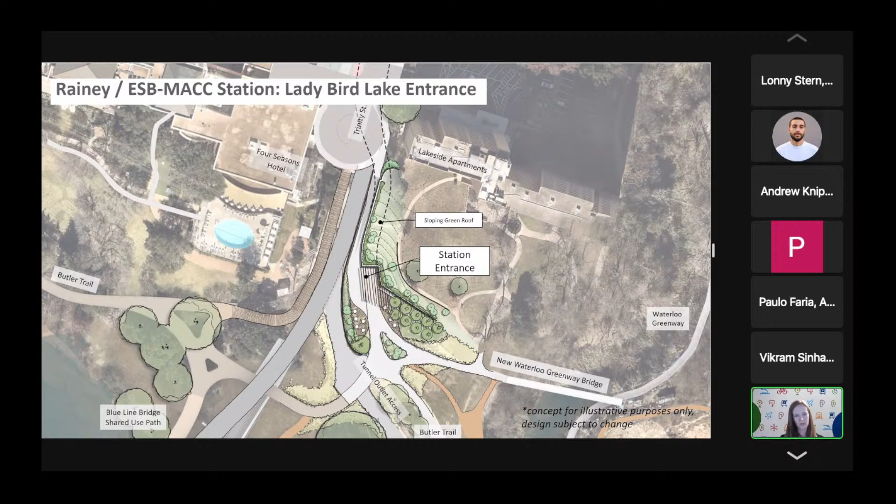Next slide. A little of what that might look like, having an entrance that's really unobtrusive and blends into the park-like setting here. You can see these kind of landscaped or green roof type of environments.

And what you're seeing below is where I mentioned the trains dive into that lower tunnel, and the pedestrians come up at that gentle sloped ramp to daylight with a low sloped roof, which you can see here in these green roof concepts.

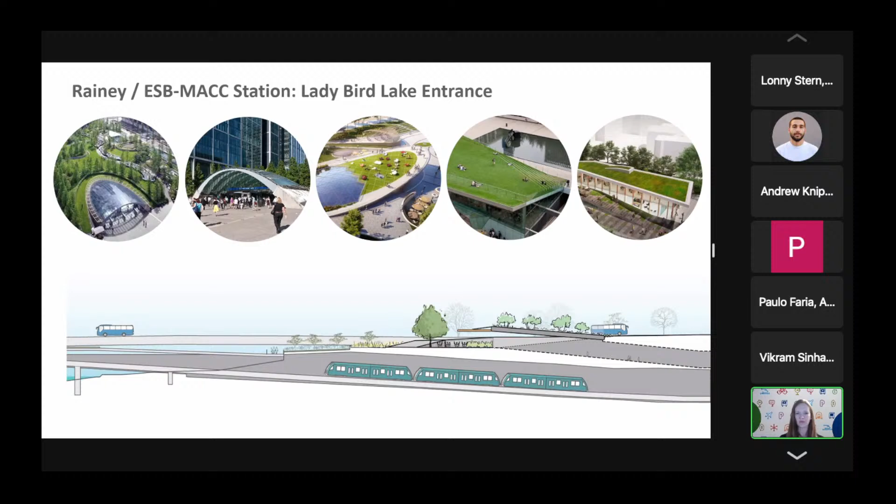Next. As we've gone through the different station locations on the Blue Line and the downtown transit hub, I want to talk a little about what Peter mentioned earlier in terms of being efficient with our designs, by carefully balancing the cost and the scope of the project elements.

Next slide. So the starting point is what I described earlier, a continuous concourse that connects between each of these stations, all the way from Republic Square through Congress Avenue, connecting to the Brush Square entrance to the Red Line and even buses that could connect at the surface in the future, down to the Rainey MACC station. Some of the options we've looked at, next slide, are prioritizing which of those connections are the most critical.

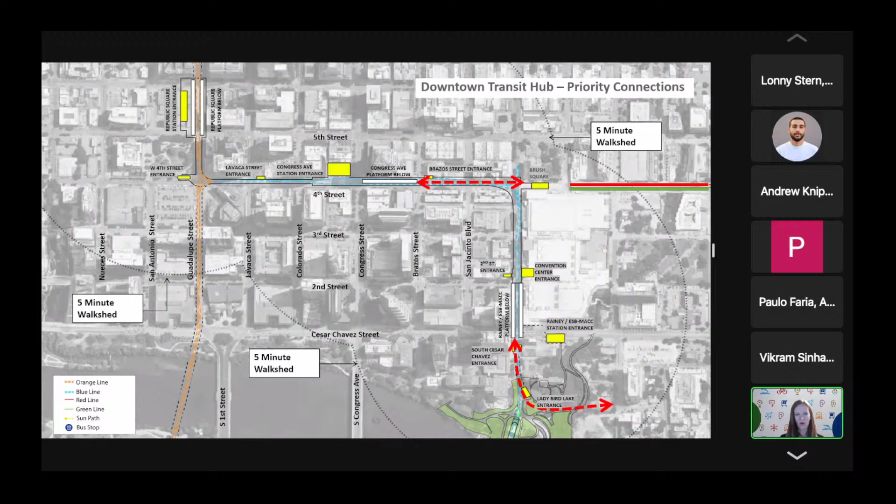For example, providing the connection from the Red Line and from Brush Square and the Convention Center over to the Congress Avenue station, so there's a direct pathway from those points to the Congress station without having to, say, walk past the station at street level to the entrance that's actually to the west of the station, and then reverse track and come back to the station underground. This one would provide that direct, shortest path connection between those points.

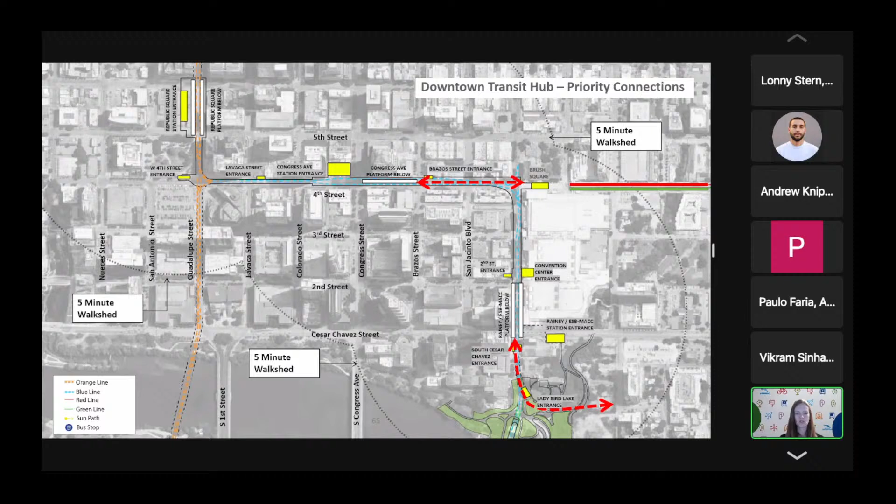And similarly, down to the south, providing the connections from the ESB-MACC and Rainey District areas to the Rainey MACC station.

With those critical connections in mind, we looked at what some possible scope reductions could be evaluated on the project, and are looking for feedback on these. One possible reduction is to remove the concourse between the Congress Avenue station and the Orange Line, or really all the way to the Republic Square connection. The others being the concourse between the Rainey MACC station and Brush Square, as well as the additional entrance east closer to Waller Creek along Cesar Chavez to the Rainey MACC station, since there is redundancy in entrances to that location. Even with removing those, there would still be walkable access from each direction to those stations.

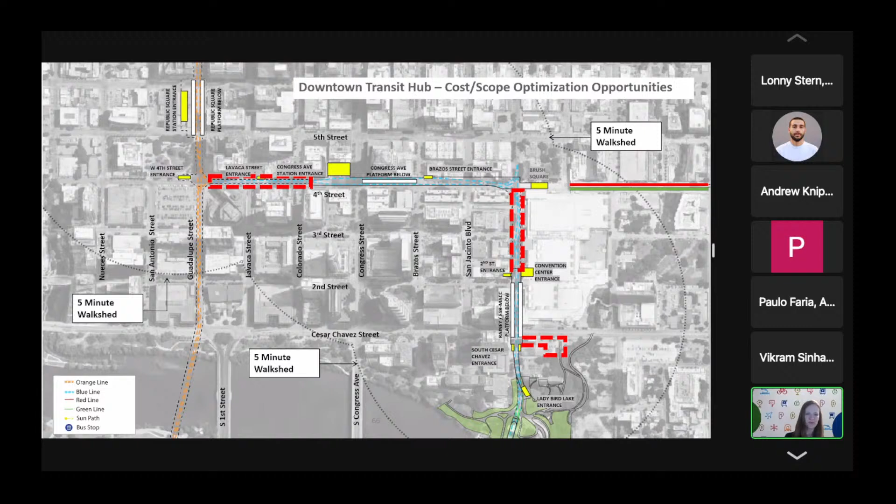And with that, I know we're running a little short on time, but would be happy to answer any questions.